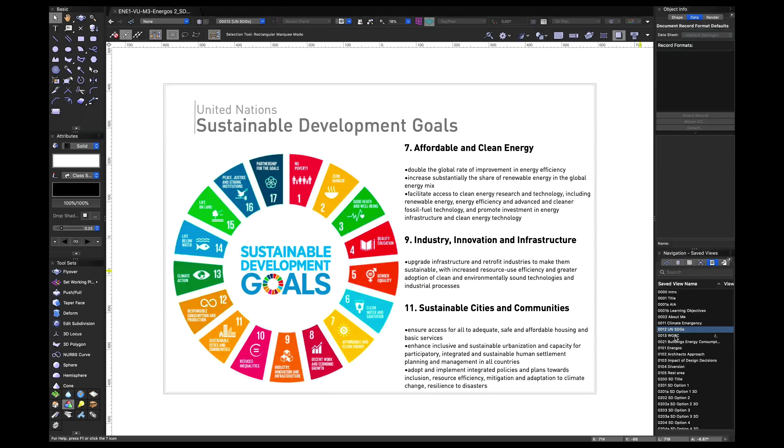So a little bit about the context we find ourselves in. You're all probably very well aware of the climate emergency at the moment. The United Nations has its Sustainable Development Goals in order to tackle these emergencies, talking about affordable and clean energy, about sustainable cities, resilient cities and communities.

The World Green Building Council has its net zero carbon commitment, advancing net zero carbon, challenging companies, cities, states and regions to reach net zero operating emissions by 2030, and advocating for all buildings to be net zero in operation by 2050. You can see some who already signed up to this, and the list grew longer since I took this image.

Buildings have a big part to play in all of this. We're looking at data from Europe, but it's a similar picture worldwide. Buildings account for 40% of total energy consumption and nearly 40% of greenhouse gas emissions. So this is a very relevant conversation for architects, who are realizing more and more their part to play as designers of those buildings. And this is what leads us to Energos, a tool in Vectorworks that allows energy performance evaluation.

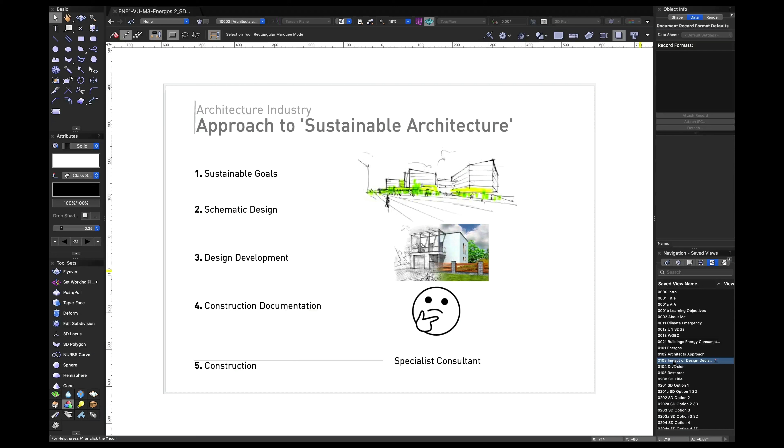Now, a typical thing that happens with sustainable design is you have sustainable goals at the early concept design stages, but they then tend to get watered down and lost along the way as the design progresses into developed, then into construction documentation. And by the time the project reaches a specialist consultant, this is the first time that you get actual metrics. These sustainable goals are often lost, and the maneuvering room for any meaningful change is much reduced.

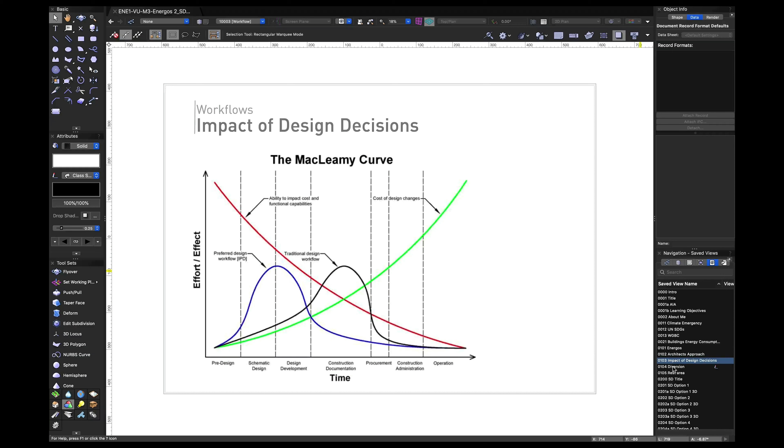I see the path of energy modeling as somewhat of a diversion onto a specialist road, and as sort of a parallel process to the main architectural design, because it often involves a separate model. This means it's not connected to the main architectural design model and needs to be kept up to date, or is done by a consultant.

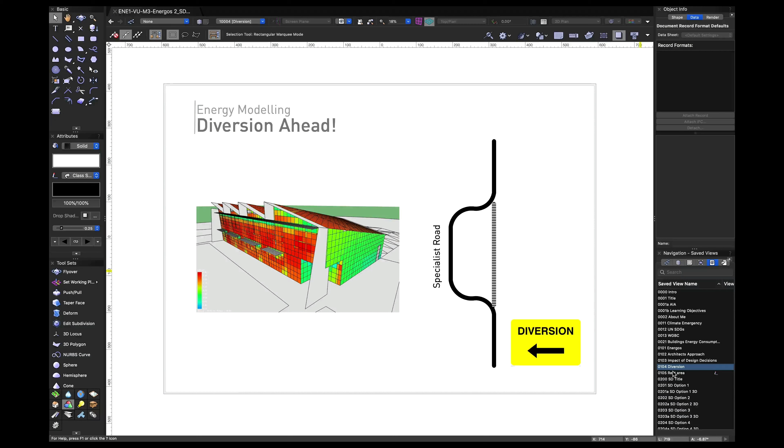What I'd like to propose is to be fizzing along the avenue of architectural design with regular rest stops during the design at certain points. That would allow us to evaluate the energy performance of the building at various stages of the design, allow us to make informed design decisions and be in control of the process.

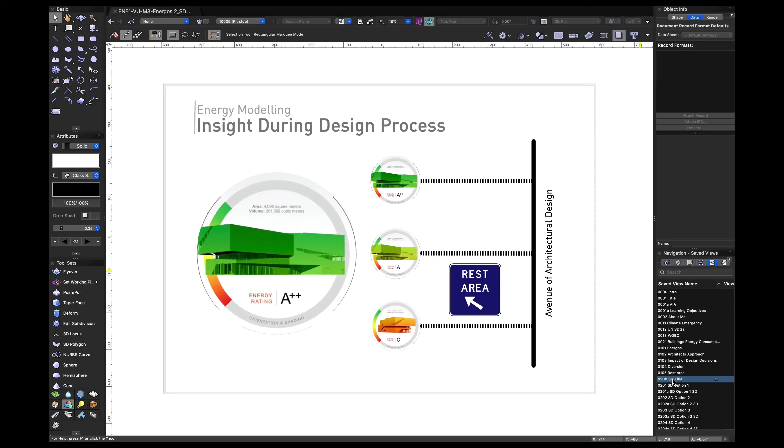Let's see it in practice. This workflow presentation consists of 3 parts, simulating stages in the architectural design process. Each phase will see us go through different considerations from an energy perspective, as relevant to the level of detail our design is at. We'll start at Schematic Design, where we will explore the design from a conceptual point of view. We will see massing studies and some basic energy settings. We can compare our design options and start having a sneak peek into our energy performance.

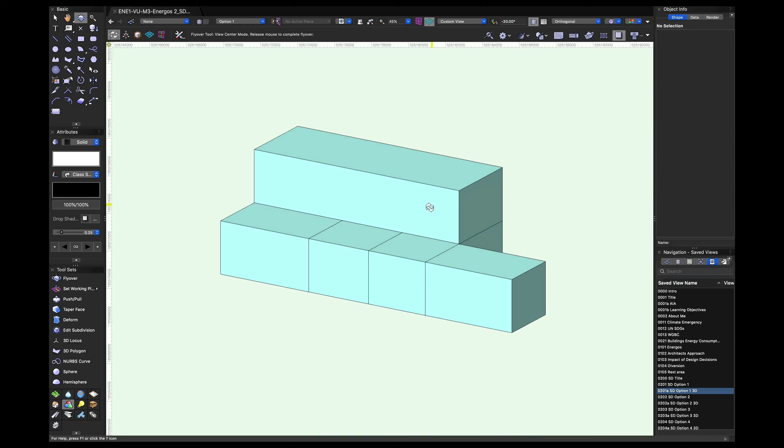As this is the early concept design stage, I've developed some options to explore different configurations I might want to use to express my design intent for this project. I'm using spaces as the objects that I'm doing my massing studies with. Spaces are particularly useful for this kind of early stage concept work, as they're intelligent objects that store various data that can be used later in the project, such as for energy calculations or to create room finishing schedules.

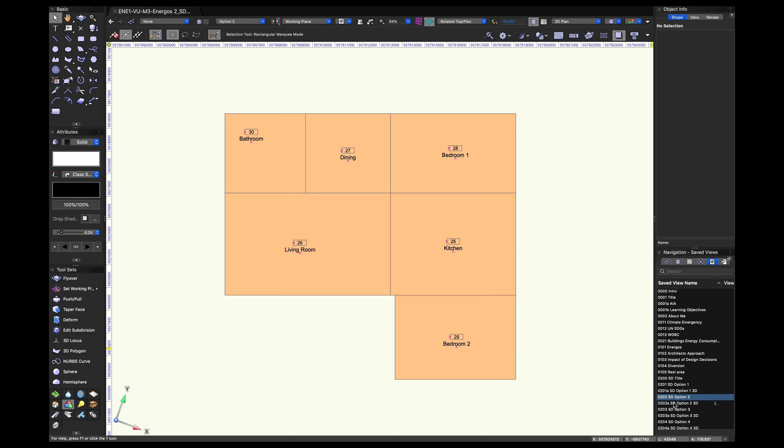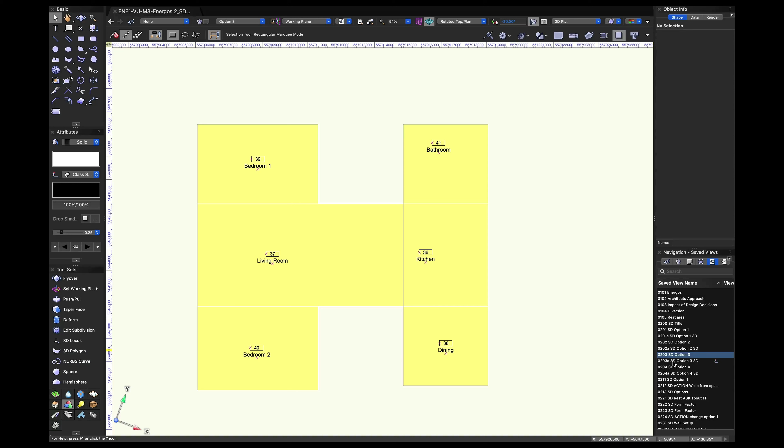I have 4 different design options of a house design, and my 4 options all have the same number of rooms. Those rooms have the same areas, and I'm just moving them around, almost like Legos, to get different configurations while maintaining the same total relevant floor area.

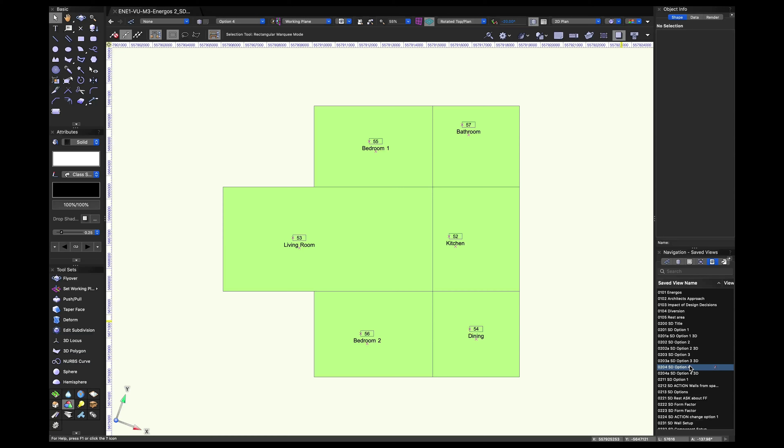So you can see some different design options here and how they have been differently configured while keeping the same balance of areas. Let's just jump back to option 1 now to show how to get our design options to a bare minimum that's needed by Energos to perform the evaluation.

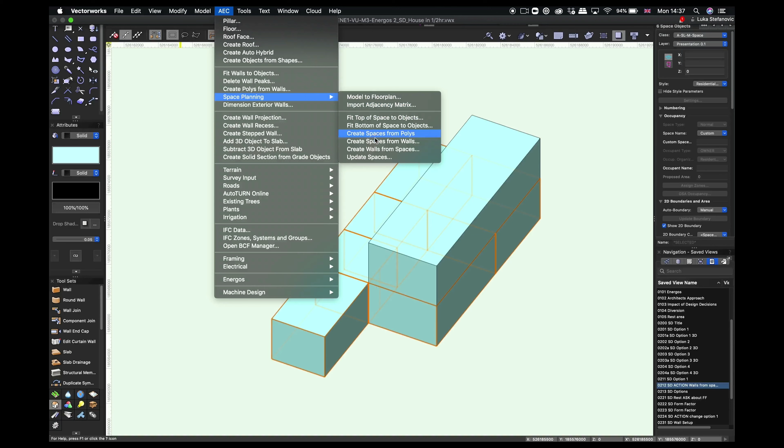So aside from spaces that will give us the total relevant floor area, we need a building envelope. I'll just select all of the spaces that I have on my ground floor layer so I can wrap them with some walls real quickly. I will create walls from spaces with the space planning set of commands. I can say that I want to create walls from selected space only. I will make sure that my source and my destination layer are correct.

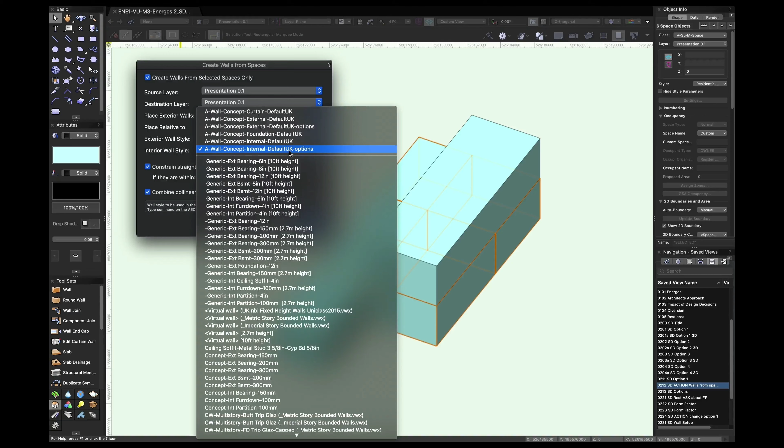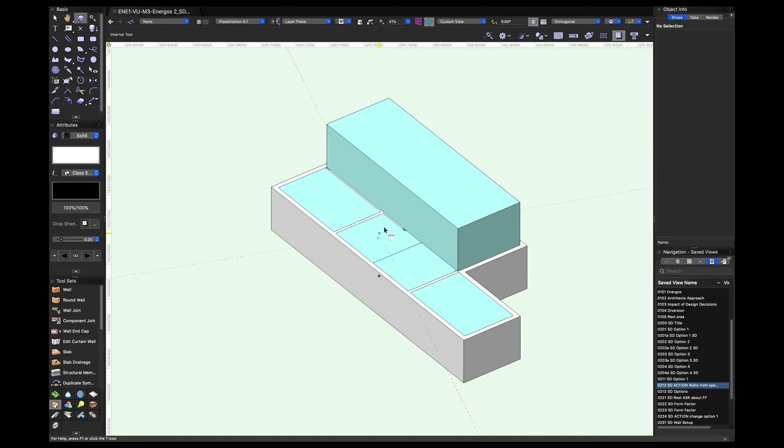Then I can say where I want my exterior walls to be aligned to and place that relative to either wall or the core component. And then I can choose an exterior and interior wall style. And then I can combine collinear interior walls and constrain straight walls to vertical or horizontal if they are within 5 degrees. And I will get my building envelope. Now at this stage, I don't really need interior walls, so I can get rid of them.

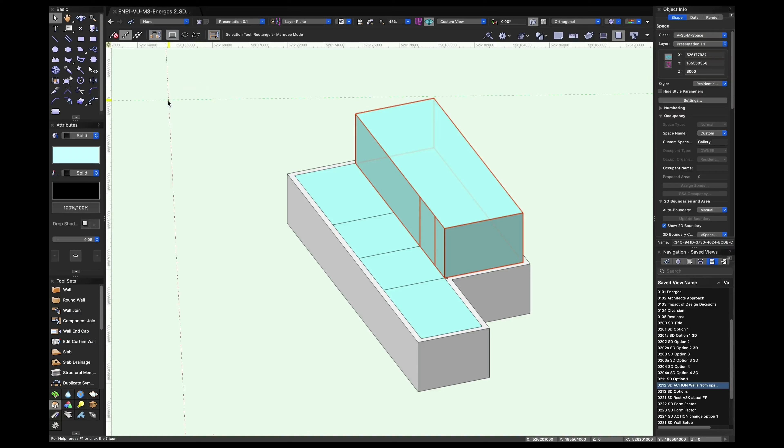Then I will select my first floor space, go back to space planning toolset and create walls from spaces once more. Now I will change the source and destination layer. Again, do it for selected spaces only, and the rest will stay the same. I'll say OK, and then we'll wrap our building with walls.

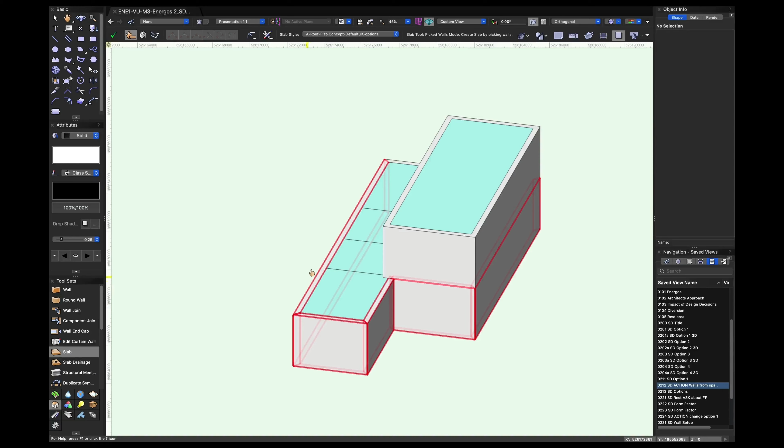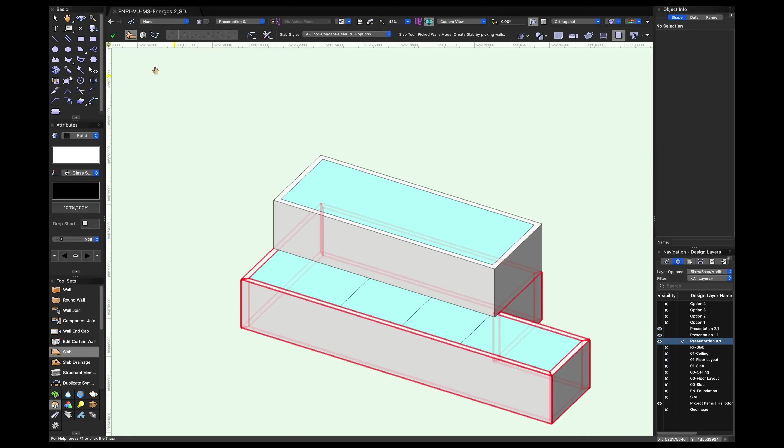So what we now need are slabs. So I can go ahead and pick the walls. Then we want to create the boundary for our slab. Make sure the slab style is the one we want, and make sure that the correct design layer is active. And then we'll create the slab.

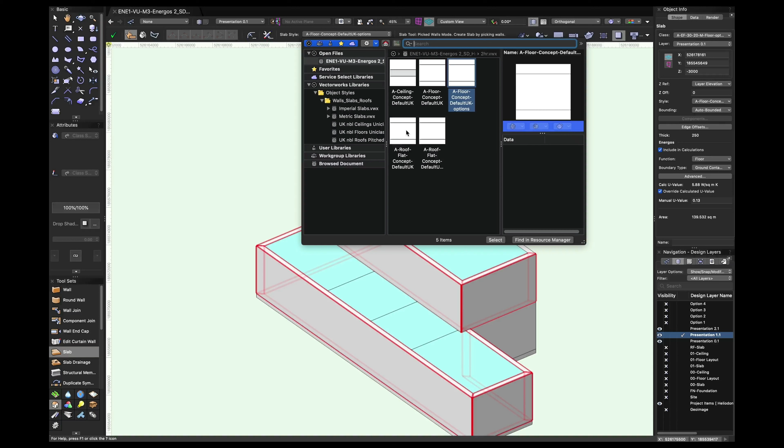We can repeat the process for the terrace, and we will select the bounding walls. We can go across different floors and design layers. That's not an issue. Just make sure that the active design layer is correct so that the slab will slot in the correct elevation, and make sure that we have the slab style that we want. Then hit the check, and we'll see our terrace slab.

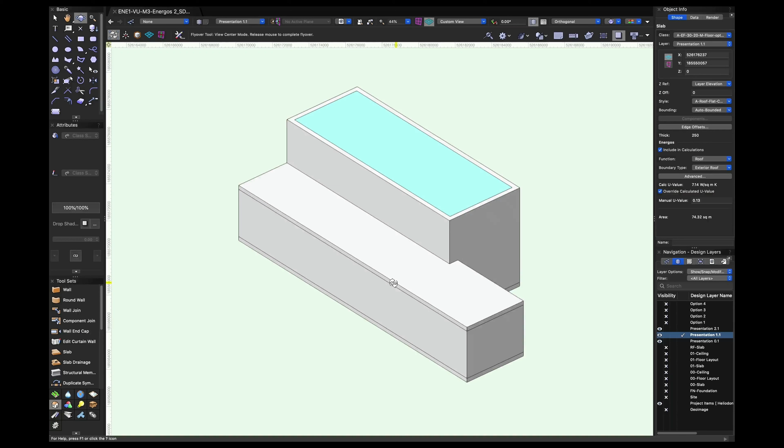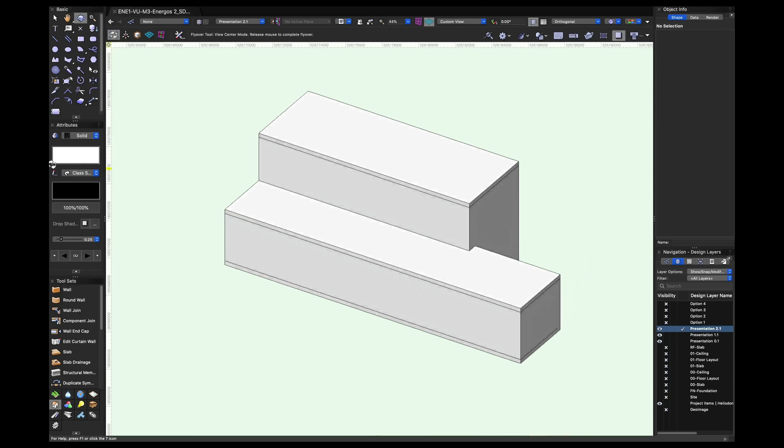And the last thing we need is the roof. Once more, we will repeat the process, change the design layer, and create the slab. Finally, there we go. We have a building envelope and we have spaces so Energos can work its magic. If we do this for all 4 design options, there is sufficient data to be able to make first rough assessments on the performance of the design options and compare the results.

Then we can go to our first rest area, which is the only thing we are interested in evaluating at this stage, and that's because it's the only thing which distinguishes between our 4 design options right now, and that is form. Form factor is defined as the ratio between the building envelope surface and the total usable floor area. The smaller the form factor, the more efficient the shape is, because there is less envelope area to lose the energy through. The more the form approaches a cube, the more efficient it is.

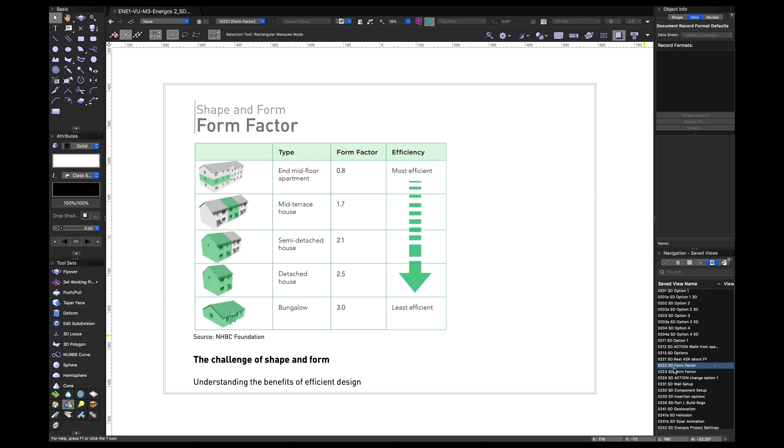Now, I'm not saying that we should be designing cubes all the time, but we can have an understanding as to how the shape affects the performance of our building at these very early stages. And then that can be a factor that informs our choice of 4 different design options. I've created a small worksheet which will tell me the form factor of all of my 4 design options. I can go and edit the report just to show you what kind of criteria I'm using.

So I'm filtering objects on option 1 design layer and with a certain wall style that's for my external walls that I'm using for the options. And then I will use component area function and the object type name. Then I will summarize the items with the object type name, which will basically show me all the walls grouped and their surface area.

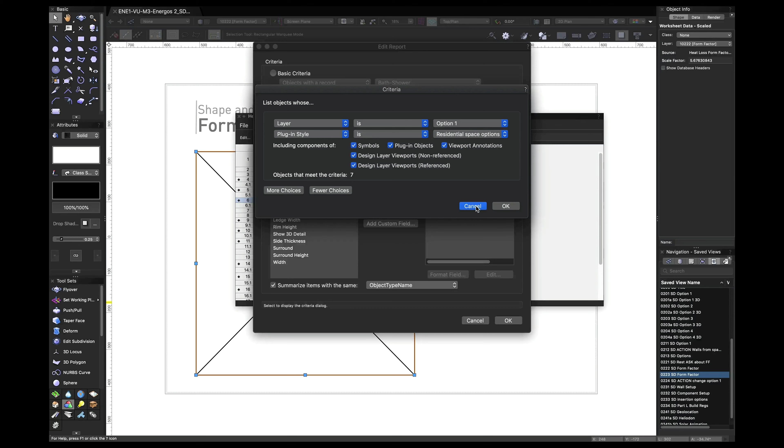Then I will do the same, show the same criteria for objects on option 1 design layer, and I will just show slab styles. Again, same commands, and that will give me the surface areas of my slab objects. Finally, I will collect the spaces on my option 1 design layer and then I will calculate the area. So that will give me the total floor areas of the spaces.

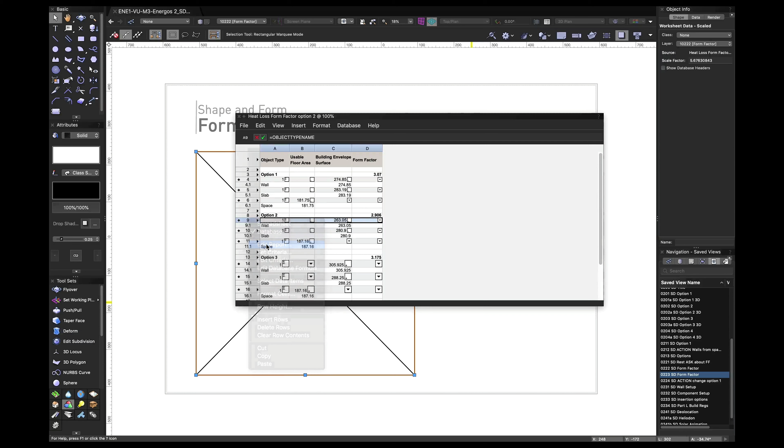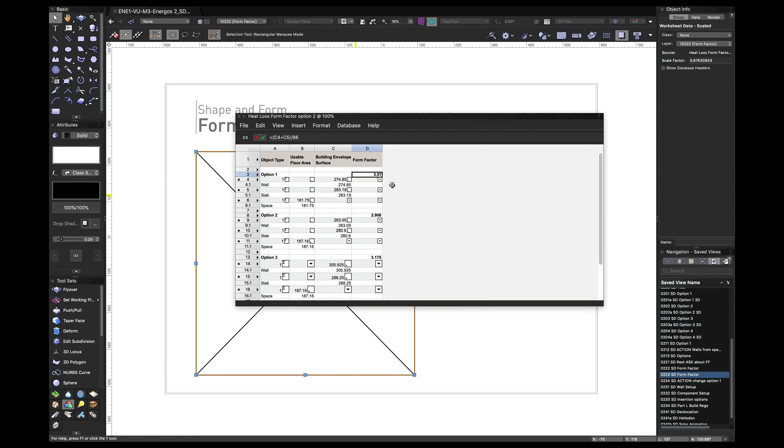And then for option 2, I will just change the criteria to collect the objects that are coming from the design layer option 2. And then the rest will be the same. So finally, to calculate the form factor, I will add the surfaces of the walls and slabs and divide that by the spaces. So we can see the results and we can see our form factors.

So what do these numbers tell us? Remember, the smaller the form factor, the more efficient the shape is. So basically, our option 3 is the least efficient one, and our option 2 is the most efficient one, with option 1 and option 4 in between, option 4 being more efficient than option 1. And if I go back to see my 4 options, that kind of makes sense because I can see that option 2 is the most compact one, and option 3 is the least compact one.

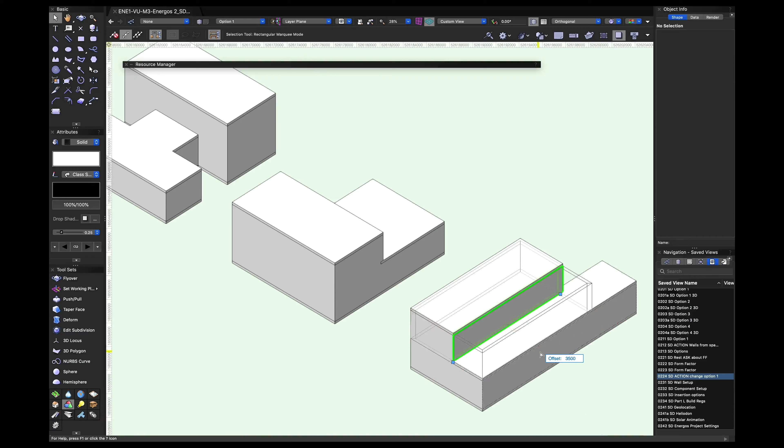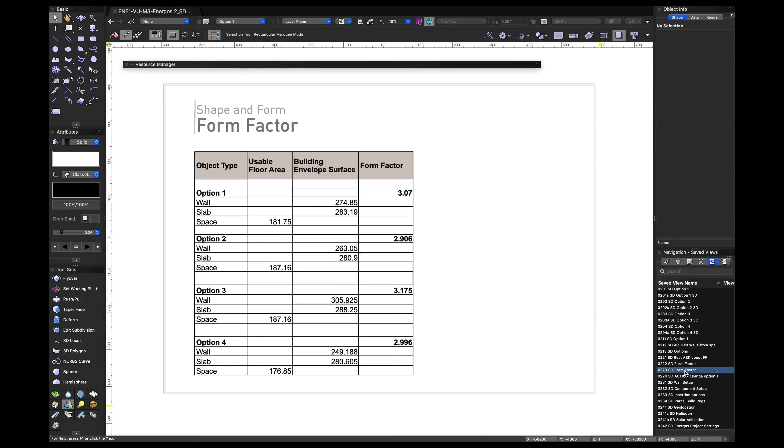Let me just move this wall. Okay, so what I have done here is I've increased the building envelope surface ever so slightly by twice the half of this wall, but I've doubled my first floor usable space. And then I can ask my worksheet to recalculate, and I'll see that my form factor for option 1 has dropped to 2.4.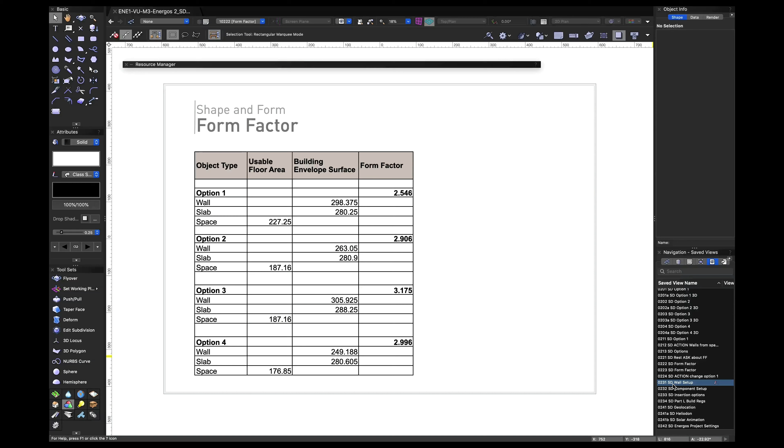Okay. And the next thing to look at is wall styles. Now, if you're not using styles in your workflow, I highly recommend you do so. Styles can give you a combination of control and flexibility when working with plugin objects. Some object parameters can be locked to a certain value for consistency, others can be customized for each individual instance to meet the project's needs. It's like a symbol definition for these plugin objects.

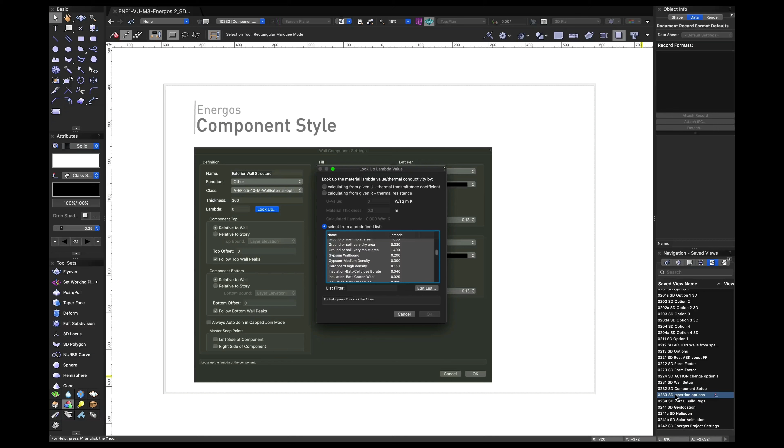Energos needs some inputs regarding the performance of our building envelope. So in the wall style, we have components, and we can assign thicknesses and lambdas to each component. But at this very early concept design stage, we probably don't know the lambdas or thicknesses, or maybe even the materials. So what we can do is use a very useful setting that the wall styles have to override the calculated U value, and we can manually input the value. Those can come from building regulations, notional specification numbers if they exist, or we can use passive house recommendations, and if we know what we are striving to achieve, those can be our target values.

The final piece of the puzzle, as far as Energos is concerned, and the last thing that it requires in order to be able to perform the calculations, is the Heliodon object. If you don't have a Heliodon object, one will be automatically added when Energos project settings are first opened. A Heliodon places natural light in the model, simulating sun. When you enter the location, accurate region or city information is used for the calculations, and Energos will pull weather data. You can manually edit the city and input the latitude, longitude, and so on for a city if you cannot find it on the list.

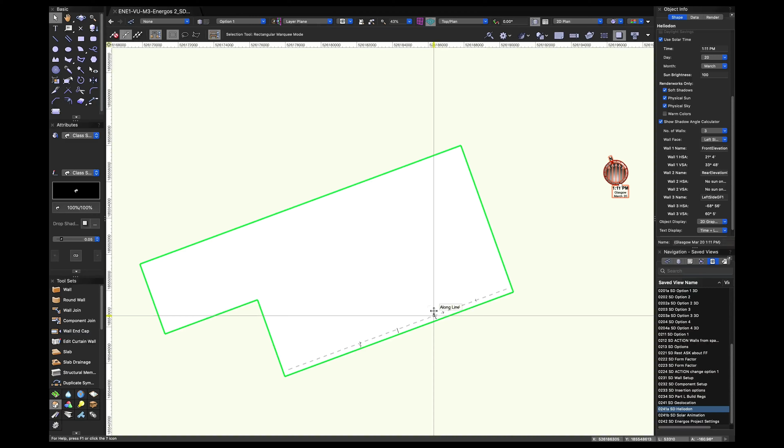Let's have a closer look at the properties and the functions of the Heliodon object now. So I will select our Heliodon in the design layer. Vertical and horizontal shadow angles can be automatically calculated for determining the correct placement of shading devices such as awnings or brise-soleils. You need to name walls and copy those names to Heliodon object info, and you can obtain those angles.

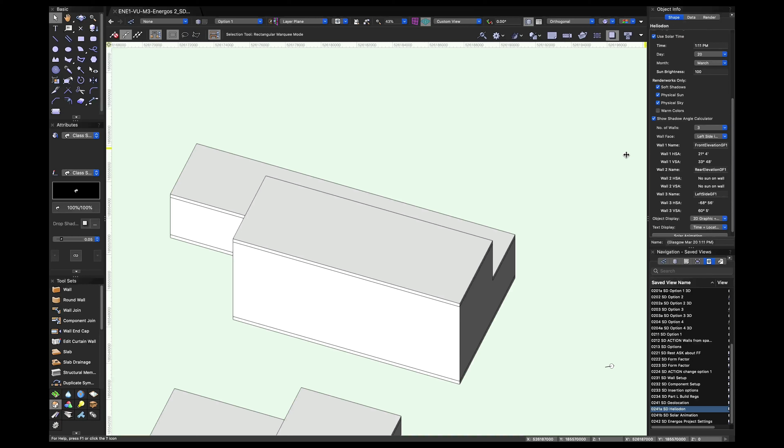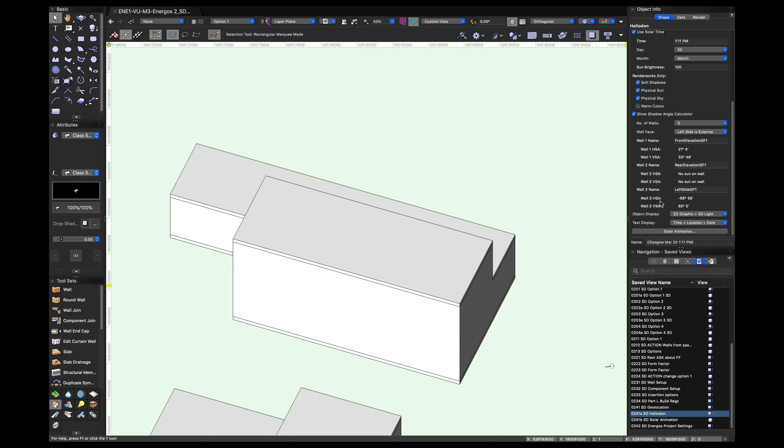This is all useful information as you're in the process of shaping the form and need to know where the sun is coming from and at what angles, so you can control the amount of sun coming through a window through the provision of appropriate shading devices. Their efficiency depends on placement and dimensions, and by shading a building or its outdoor spaces, we can reduce summer temperatures, improve comfort, and save energy. We can create solar animation to illustrate the way the sun moves over the model, and shadows are cast upon it as the sun's position changes.

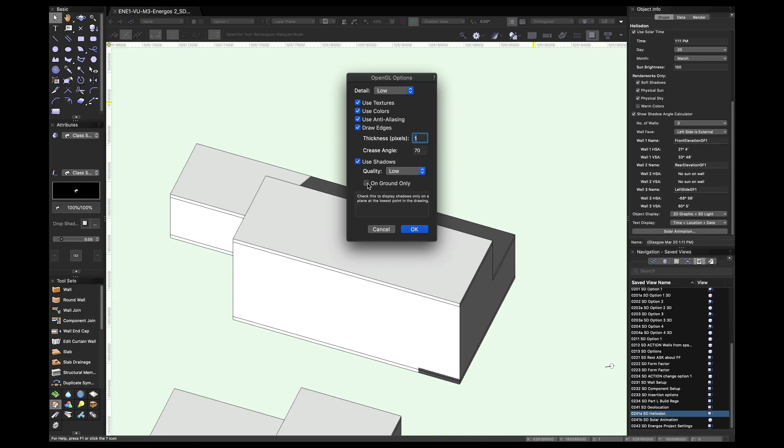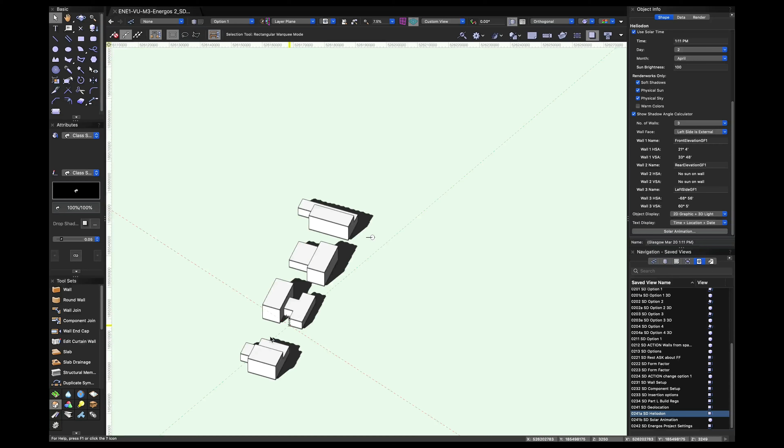Let us go into the OpenGL options so we can turn the shadows on and see on-ground shadows. Let me move this out of the way so we can see the shadows. I can change the day and the month and the shadows will reflect those changes. Let's actually zoom out so we can have a better perspective and so we can see how each one of our options is casting a shadow on the ground. That's better now. So let's go back to Solar Animation dialog.

Solar animations are interactive. We can see the effect in the model as changes are made by moving the slider. We can observe the shadows cast by the model over the course of the day or year and observe the portions of the model that are illuminated by sunlight. If we model context such as surrounding buildings, trees, and other elements, then we could focus on our area of the model, such as a window, to study to determine when, or if, sunshine will affect it.

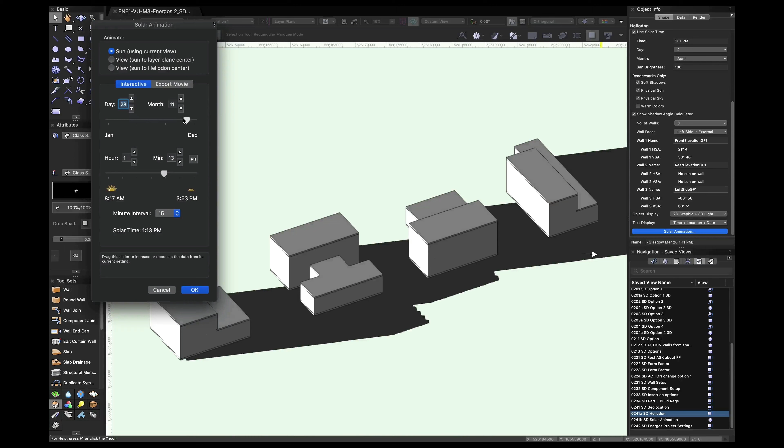Solar animations can be generated on screen or by exporting to a movie file. We can animate either time during the day or days during the year. We can set the start and end as well as the interval. We can display time and date as text. We can see some basic info and then export this as a short video.

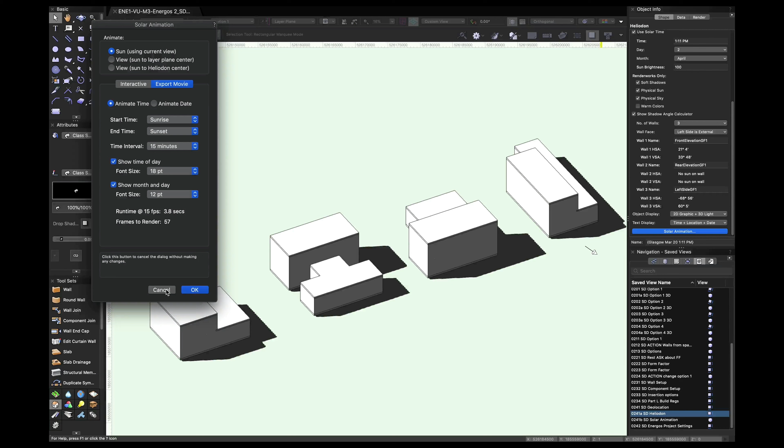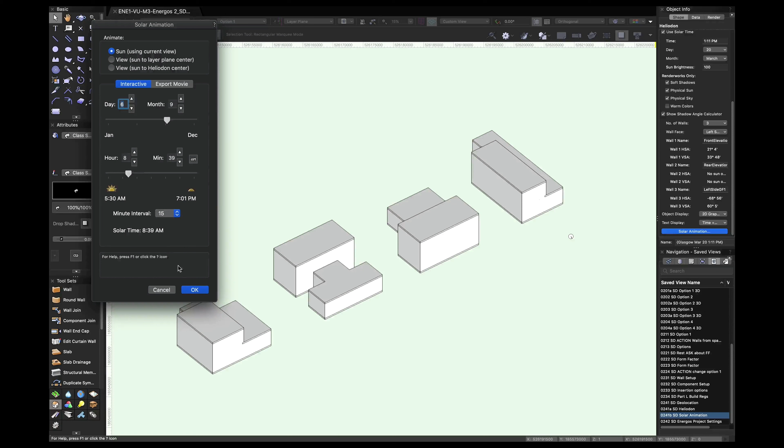Okay, let's go back to OpenGL settings to turn the shadows off. I just wanted to show you how you can still look at solar animations. Notice as I move the slider how the sun rays move over the model during the course of the year or day, and different portions of the model are illuminated by sunlight. Again, this is all relevant information to take into account when making design decisions at early design phases.

And finally, we can look at Energos. I'll open the project settings so we can see we are in the basic range of parameters. We can input the data about our project. We can select a pre-configured setup at this point and for the building.

So we can see our building elements list is very simple, just 10 walls at this point, 2 roofs, 1 slab, no windows, no doors, very crude. The results will be very imprecise at this point, but they will be so for all 4 in the same way. But what we are looking for at this point is a comparison between our design options.

I have them on 4 different design layers, and I'm just telling it to collect the elements from my option 1 layer so I can see the results for that one. So the spaces will give us our total relevant floor area, and we can select a pre-configured system, and we can also have a look at our results now.

You can look at these color bar type of results. We can inspect the building element, then we can see the results for roofs, walls, windows, doors, thermal bridges, and so on. Or we can have a look at more detailed numerical outputs. That's my option 1. Then I can go back, tell Energos to collect elements, not from layer option 1, but from option 2.

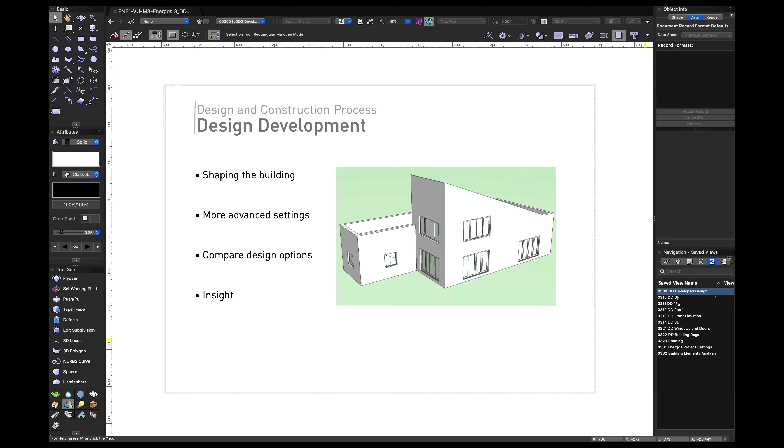We are going to go into some more advanced settings from the energy point of view, and we can still compare design options, and we are now starting to have some insight into our energy performance. I'll just quickly show you what the building looks like. You can see the plans for ground floor, first floor, roof plans, front elevation, and 3D view.

So one notable difference at this stage would be the addition of windows and doors. Windows and doors are building elements and they are plug-in objects. You should really think of them in a similar way to the walls. They will also have styles, and I would again encourage you to use them.

So you can set manual override U value instead of the automatic calculation, which is still preferable at this point because you might not know which exact window product you'll use to be able to give Energos specific data to use in its automatic calculation. Again, those manually set values can come from building regulations, from Passive House, or they could be your own targets that you're looking to achieve.

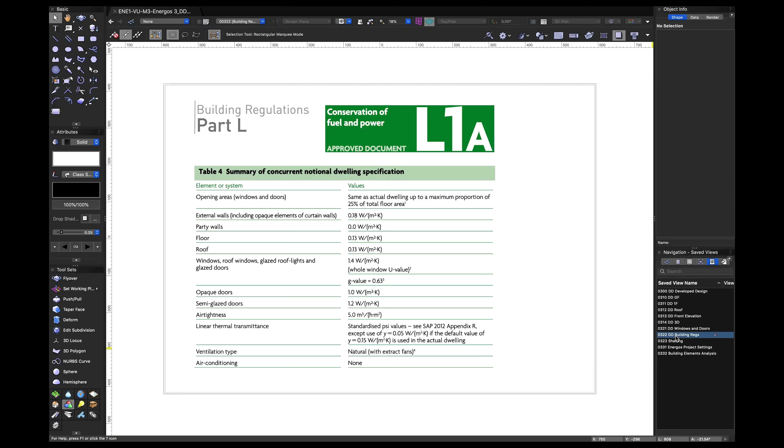If I select one of these openings, the object info palette will tell me that it's a door in a wall. Here I can see the style of the door object, and there are lots of different parameters. What I want to talk about is shading. General shading means the general orientation of the opening. North-facing openings will have high general shading, south-facing ones will have low or no general shading. You can also specify a custom shading coverage percentage as well.

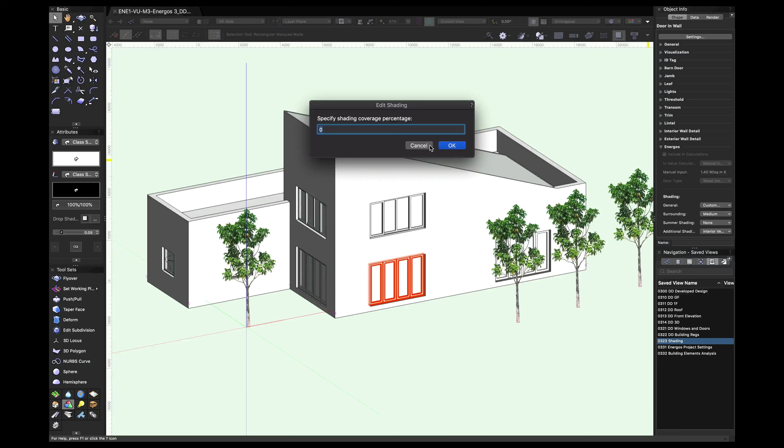Surrounding shading means context. So surrounding buildings, trees, party walls that might cast a shadow over the opening, and so on. Summer shading is a horizontal shading element above the opening. It could be overhangs, awnings, brise-soleil, anything which is above the opening and is providing shading to it. Additional shading is, as you can see, interior or exterior blinds, foil, shutters, so on. So a combination of these four will vary for all of the windows and doors that we have, depending on the situation for every single opening.

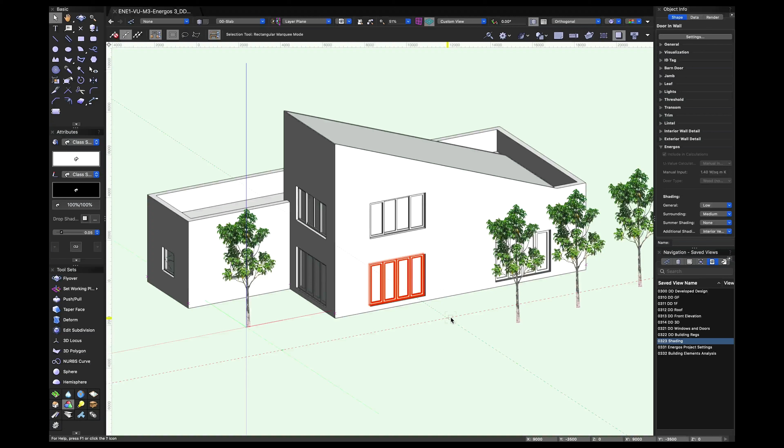Energos needs this input from you as designers in order to take shading into account, because it does not actually model sun paths when performing calculations. For example, if you model a horizontal element above this opening, it will make no difference to the calculation and to the shading of the opening below it. What will make a difference is these values. This is what enables Energos to output results in a matter of seconds when you update your project settings, but it requires manual input from you to perform the correct calculation.

And then we can go into the Energos project settings, which look very, very similar to the previous stage, as we're still in the basic range of parameters. We're still using pre-configured usage, and now we need to specify the design layers that we are collecting. This is different. Building elements will now be a bit different than our previous four options. Building elements have a little more complexity. There are a lot more elements in here, but we will not be using all of the walls. For example, internal walls will not be taken into account. Parapet walls also. I have slabs, walls, roof, but now I have windows and doors as well. I can apply a filter to look only at windows and doors.

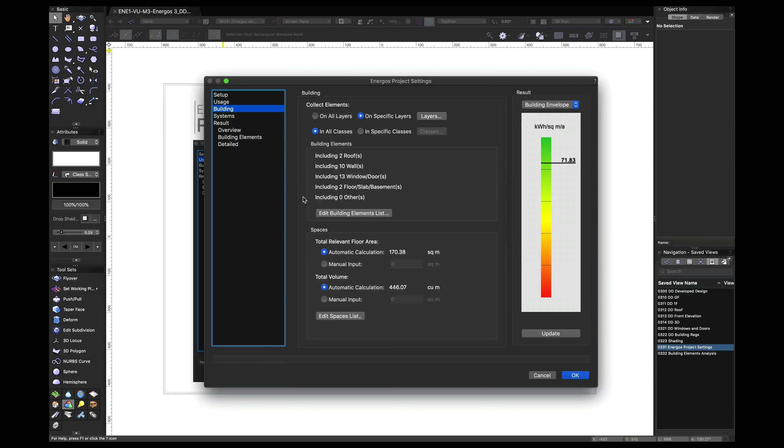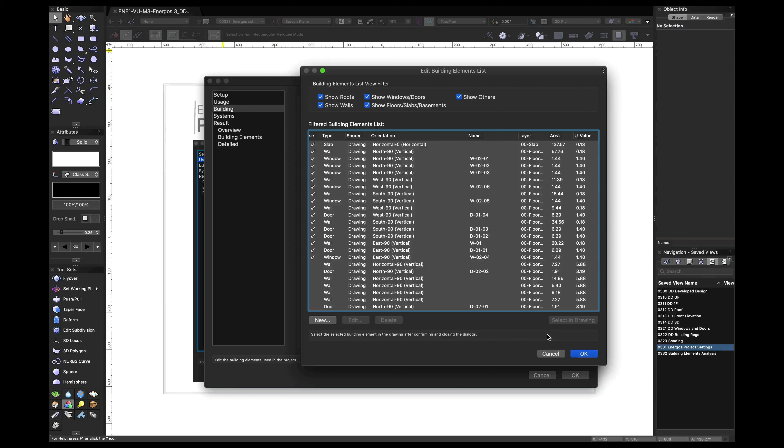Spaces now give total relevant floor area as a much more accurate number at this point in time. We are using the overridden U values for walls, slabs, roofs, windows, and doors that we set in the styles of these plug-in objects. Our building elements are still generic, so from a thermal performance perspective, not much changes, but in general, at this stage, our project is more developed and more defined, so our results will reflect that.

Looking at the overview of our results, we can see the building envelope performance and the performance per building element. That will tell us that our windows and doors account for a large percentage of that building envelope performance number. And that is useful information that helps with our design decisions as we move forward, and we can think about improving our design in that particular area. We could reduce the size of openings, or we can consider using more efficient external windows and doors. And let's have a look at the detailed results as well.

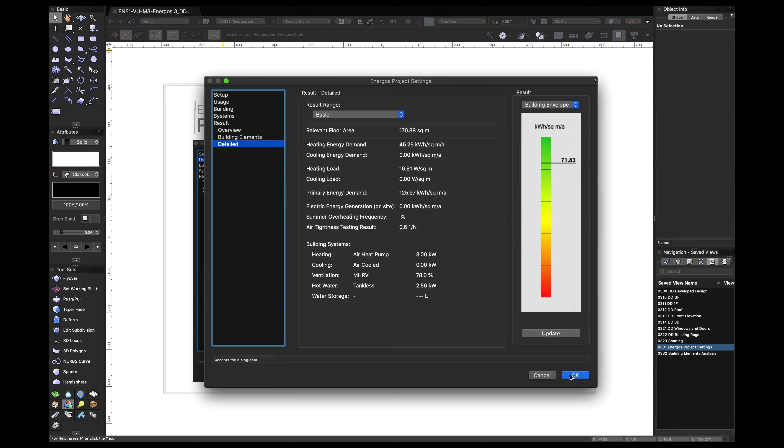Now, moving on into the next phase as our project progresses further, we'll fast forward to construction documentation and the stage where we add technical detailed definitions, and we look into advanced energy settings, and we will continue to look at component analysis. This is the phase where we can gain a proper understanding of our design from the energy performance perspective.

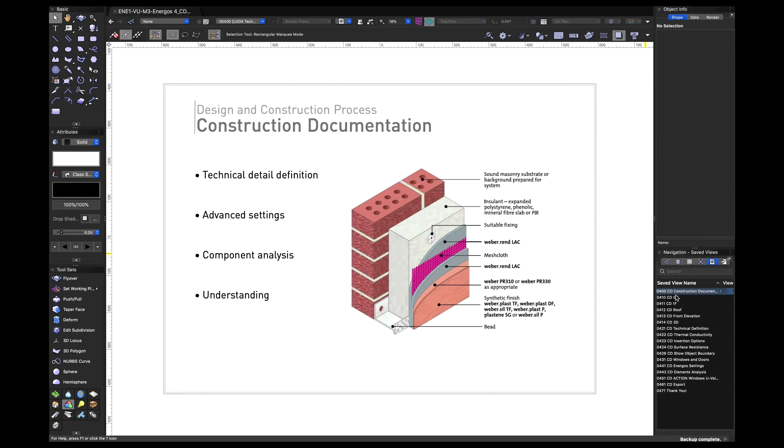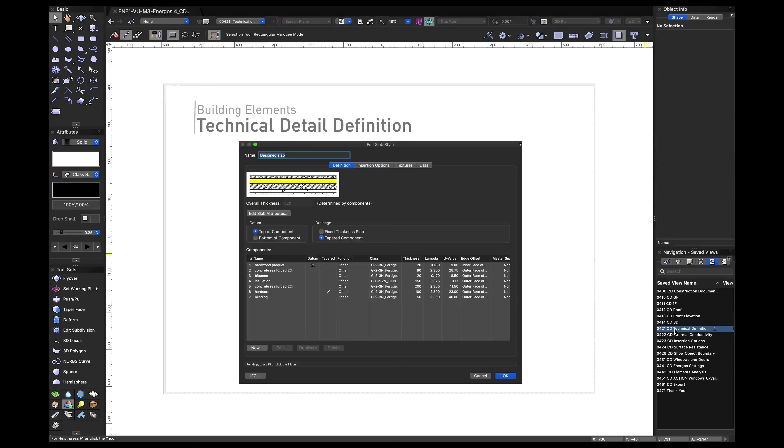It's time to look closer into the technical detailed definition of our building elements. And we can see here in the slab style settings what's changed. Our slab style no longer has generic components. We have now defined those to reflect materials they will consist of. When we open component settings, we can define components thicknesses and thermal conductivity, otherwise known as lambda.

As lambda is a material property, there is a handy list here where you can look up values for common materials. If you know lambda values of materials you're using to be different to these, you can manually input a value and you can even add them to the list to be reused at a later time.

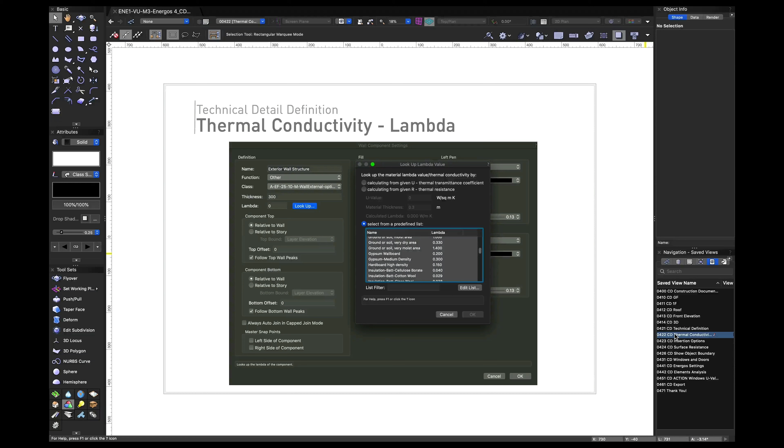What this means is that in Insertion Options tab Energos section, we will no longer ask it to take the overridden U value, but it will instead calculate the U value for us, based on all the building elements, component thicknesses and lambdas. There is one more parameter that you need to set for U value calculation to be accurate, and that is object boundary type.

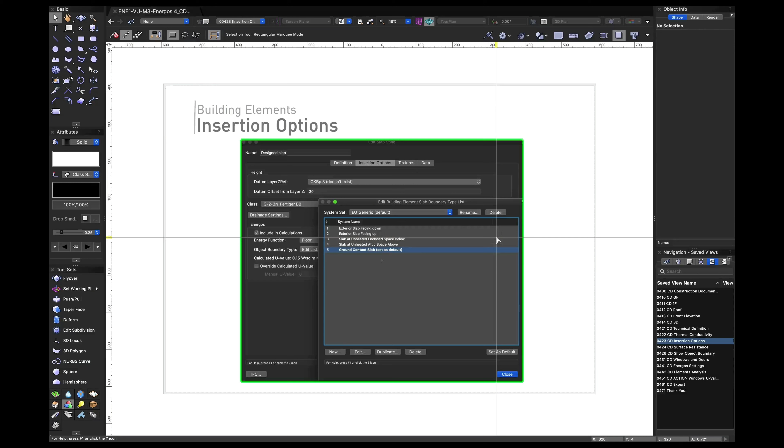You can see the options available are ground contact slab, slab with unheated attic space above, slab at unheated enclosed space below, exterior slab facing up, or exterior slab facing down. This is due to the way U values are calculated. Unlike lambda, that is a material property, U value will depend on the position of building element in the envelope and on the direction of the heat flow.

As you can see in this diagram, surface resistance coefficients will vary across horizontal or vertical surfaces like walls or floors or roofs, external or internal surfaces, like when you have an attic above or it's a flat roof. Good news is these coefficients are built into Vectorworks, so you don't have to worry about what those are. What you need to do is simply choose the correct boundary conditions of your building elements.

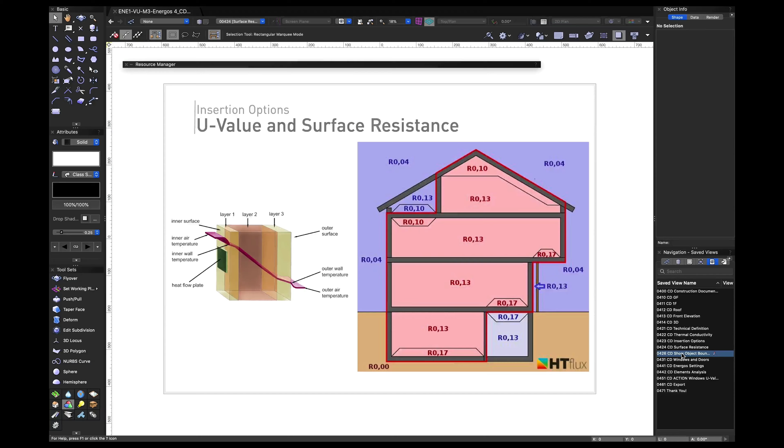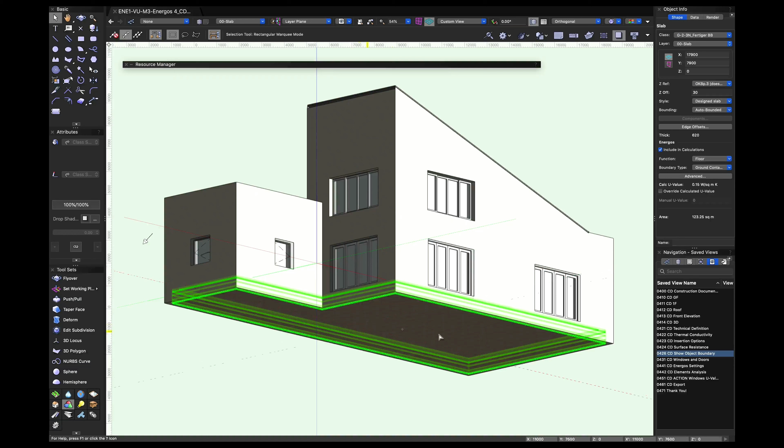Now let me show you the difference in our model. For the terrace, I have chosen roof as a function and exterior roof as boundary type. And for ground floor slab, floor as function and ground contact slab as boundary type. Wall is set as exterior wall.

We continue looking at building elements. Next up are windows and doors. In a similar fashion, the style settings under Energos tab, we will change U value from manual input to automatic calculation, and you will see the door type parameter become available. We can now choose from a number of configurations here that have different values. You can see what these are by clicking Edit List, and then you can select a particular door type.

To show you an example, this is the one I created for this project, so we can see exactly what's been set for frame U value, thermal bridge glazing edge, thermal bridge wall insulation, solar heat gain factor, glazing U value, visibility transmittance, and air leakage. Coupled with structural opening dimensions, this is where Energos will get the information about the thermal bridging of the openings, and these values will translate to thermal bridges calculation. Similarly, air leakage will inform air tightness calculation.

Once in our design, we know exactly which door product we are going to specify. Then we can get this data from product data sheets, and then we can set all of these parameters. We can add a new door type configuration on this list, or we can duplicate a similar one, and then we can just modify the numbers as needed.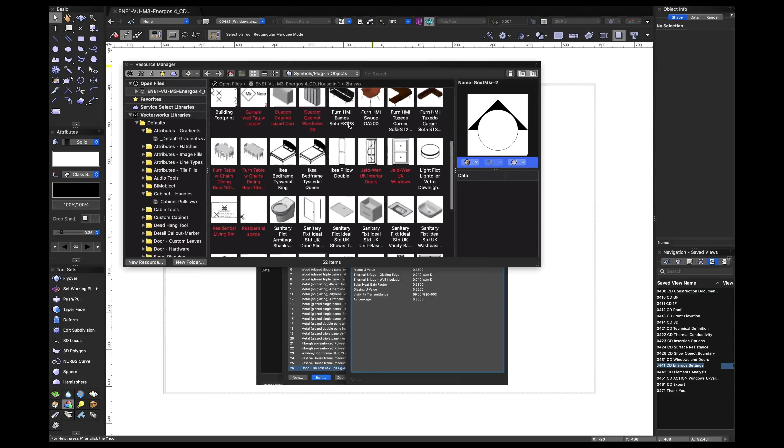The window settings are very similar. Let me just find a window style. In Energos tab, we can see the only difference is it's not listed as a single type. The frame and glazing parameters are separate. We can still edit the list, and then we can see the parameters like U value, thermal bridge, and air leakage for the frame only.

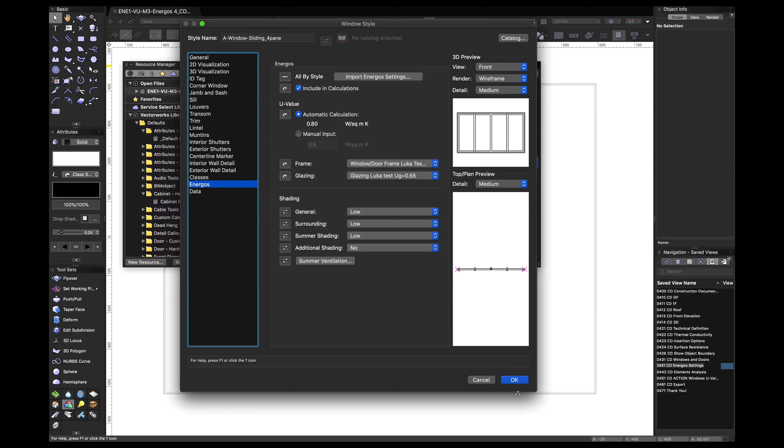And then the glazing will have some different parameters, such as the solar heat gain factor, U value, and visibility transmittance. So once you've set all these up, and once you've told your window style to automatically calculate based on these parameters, but also based on the size of the glazing and the frame and so on, Energos will automatically calculate the U value for your windows and doors. And then we have complete information of precise calculated U values of our actual building envelope.

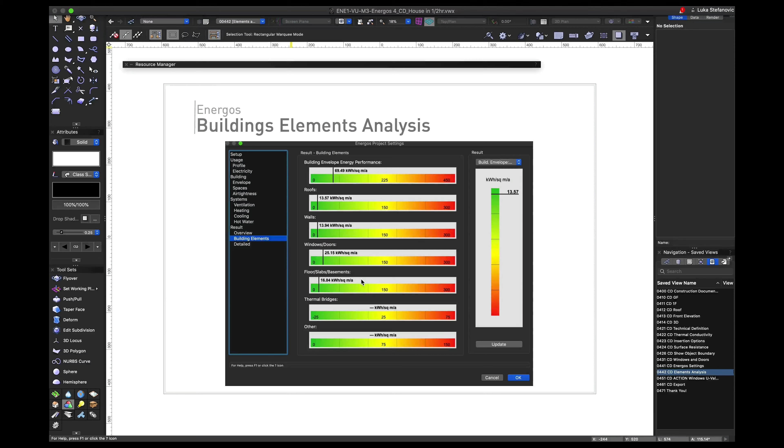We can now move into the Energos settings, and you can see that the dialog looks different. I'll just bring it up.

Now we've moved into advanced parameters, and a whole new world of options appear. We can modify the configuration instead of using a pre-configured usage pattern. We can set the user profile, a residential building type, and dwelling as utilization pattern. Number of occupants can be estimated from the floor area, or we can input the values if we know them.

We can set electricity usage and include or exclude different types of electrical equipment, like small appliances, have a dryer and not have clothesline evaporation. We can choose an equipment system and tell Energos whether that's inside or outside of the thermal envelope. For example, if we have a washing and drying cupboard that is not in a heated space.

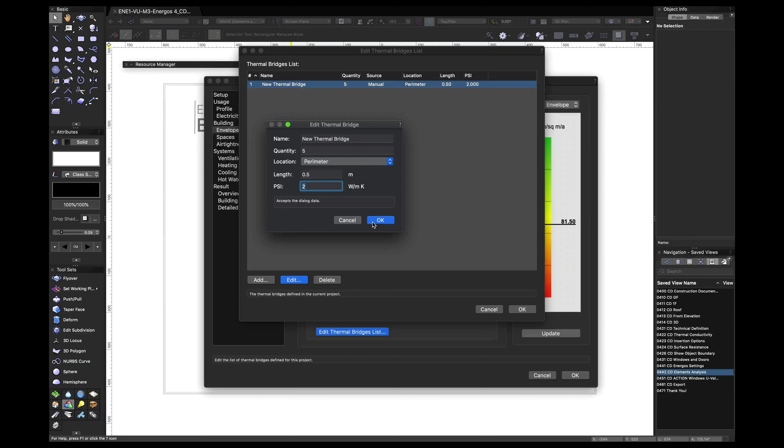Building envelope is pretty much the same as in the previous stage, but now we can see thermal bridges here. That is in addition to what is automatically taken into account based on openings, as we previously talked about. We can manually input a percentage, or we could do the automatic calculation based on the thermal bridges list, where we can add a thermal bridge specifying quantity, length, and location, which could be any one of these. And we need to know the psi factor of the thermal bridge as well.

Spaces are again what gives us our total relevant floor area and the volume. We can get some information about air tightness and the air infiltration change. We can set screening exposure of our building, and we can input the air tightness test values.

Systems are showing our HVAC setup along with hot water. We can choose a ventilation system with different operation modes. We can set extract air ventilation only or heat recovery. We can include summer ventilation. And that's an interesting set of parameters because we can set the minimum acceptable indoor temperature and an overheating limit.

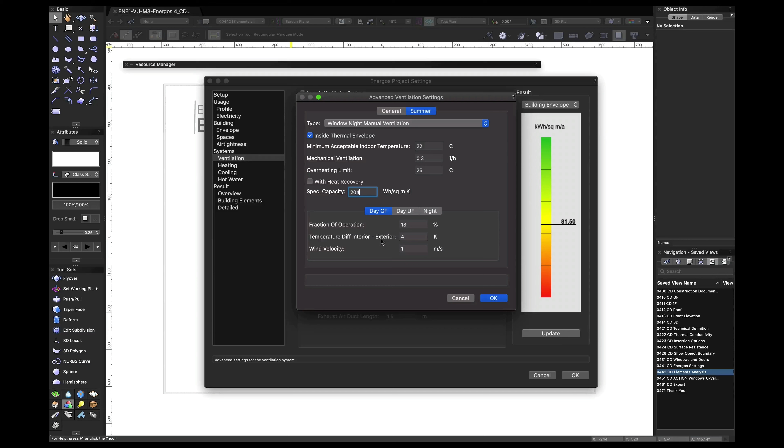Mechanical ventilation parameters are set here, how many air changes per hour we want and what is heat recovery capacity. You can specify summer ventilation operation, the temperature difference between inside and outside for the ground floor, upper floors, and for nighttime.

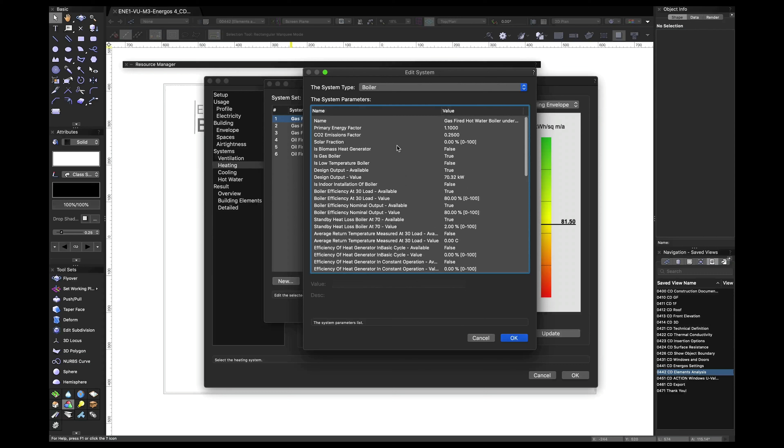Primary and secondary heating systems can be defined with the coverage percentage of each system. Perhaps we have a combination of boiler and solar. We can choose which boiler we will use, and you can even go into details for every one of these boiler settings or create a new entry on the list. There are a lot of parameters here, so I suggest sticking with presets or speaking to your mechanical engineer.

Similarly, if needed, choose a cooling system. Hot water system settings again look similar. We can include a distribution system too, that being the pipework.

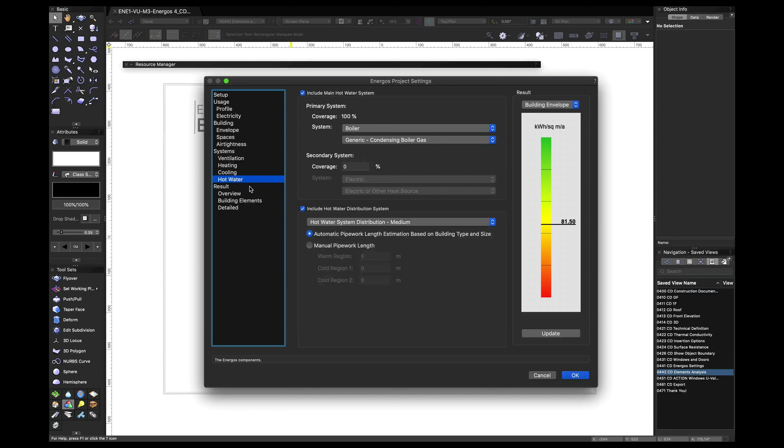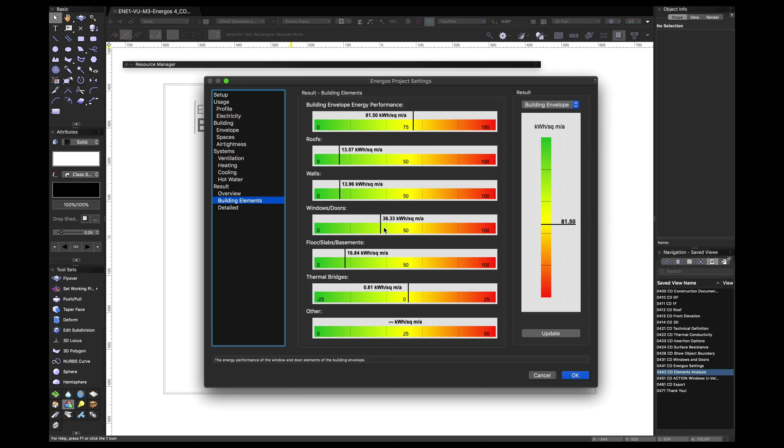Then finally, we can go look at results. We are already familiar with how they are displayed from previous stages. It's just that they're more accurate now as we know more about the building, so we can give more information to Energos to work with. So for example, you can see we have a result for thermal bridges at this point. And we can also see that the biggest contributor to building envelope performance are windows and doors.

So let's have a look at these doors, and you can see that they are still using manual input and the U value is 1.4. Let's change that to automatic calculation so it drops to 0.82 and see which kind of impact having more efficient large glazing units will make on our results.

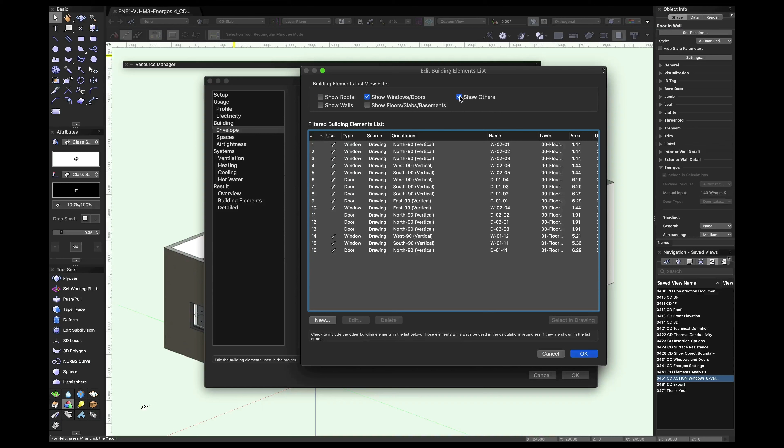If we now go back to energy settings and rerun the calculations, we'll hit update and let's see if we can actually get improved results. You can see that it's dropped quite a bit, and you can immediately see the impact. As I mentioned previously, it's very useful because it will give you results instantly.

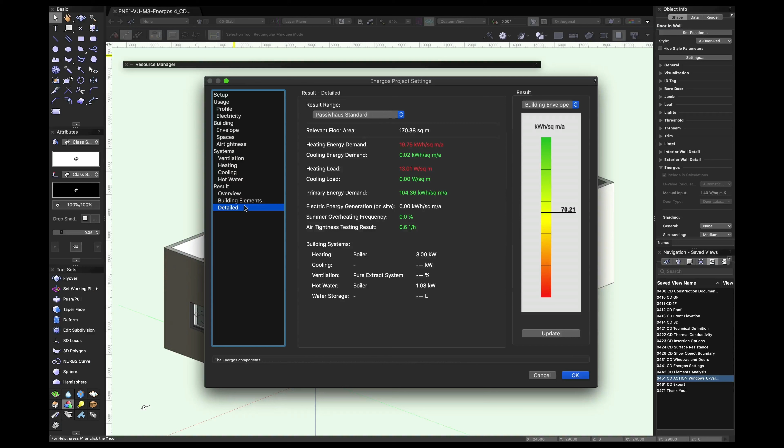It's because it's based on a mathematical calculation model that comes from Passive House, rather than modeling actual solar paths together with geometry to obtain shadows, for example. As it's running a mathematical calculation, not building a model, that's why it depends on your input as designers in terms of parameters such as shading, additional thermal bridges, etc. But it won't occupy your memory or processing power while it updates the calculation, and you can see those results in seconds.

Finally, to wrap up, we can export the results in Excel-friendly file format as comma delimited or tab delimited, so we can use the data and continue the energy performance evaluation in another software like PHPP. We can also create a label to tell us which rating we have achieved.

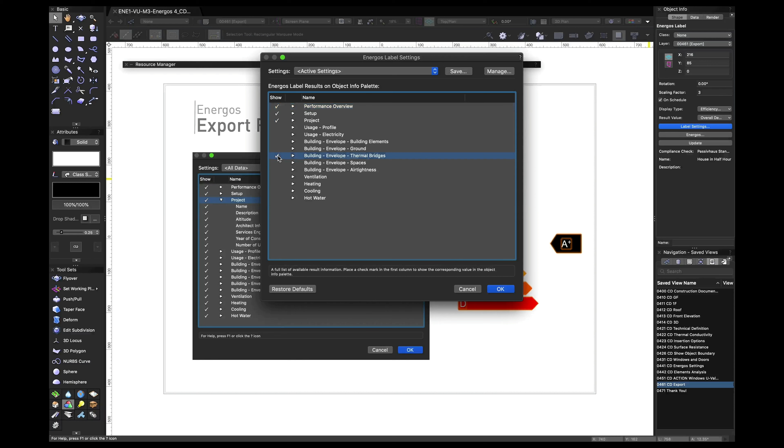This label is actually an intelligent object, and we can also tell it which data we want to see in the object info palette. I can select the whole performance overview set of parameters, and maybe let's add thermal bridges as well. And we can use this data directly, for example, in a worksheet, just to add some more functionality and some more usability within Vectorworks.